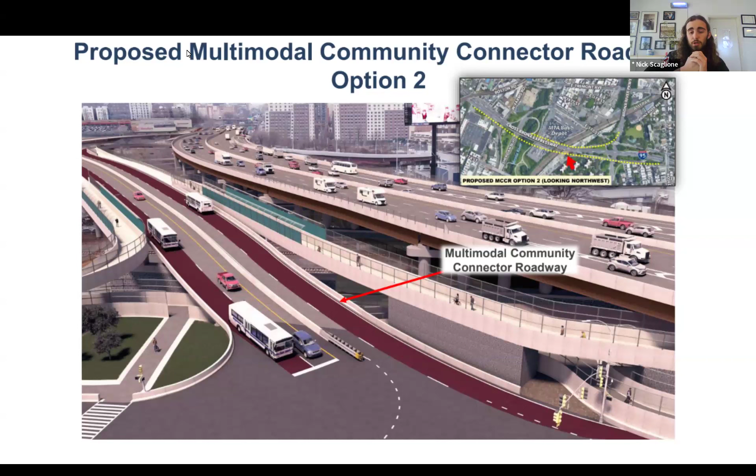You can also see it goes underneath the expressway as well, while linking on to... I think this is Boston Road. No, it's not, because Boston's up there. I'm not sure which specific road. It's Bronx River Avenue, thank you Danny. So yeah, this is where it connects onto Bronx River Avenue, which is an interesting existing crosswalk as is. There's a bunch of looping you can't see off on the sides here as well. That is going to be to make these roadways ADA compliant.

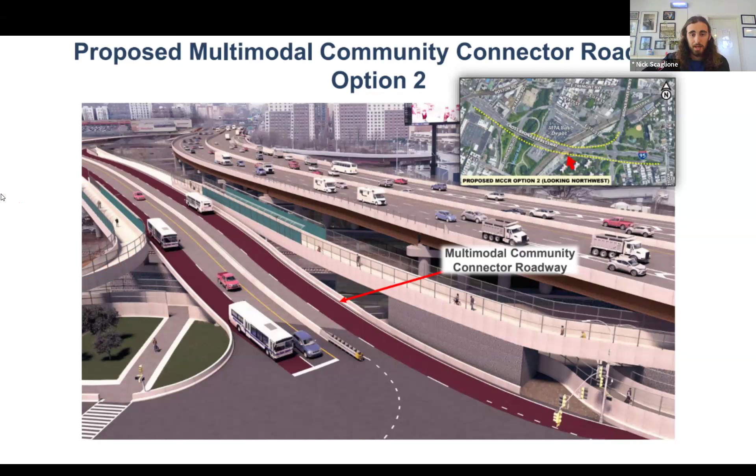And if we want to go to the next slide, we can get an idea of what this is going to look like from on the ground. You can see where this connector roadway comes up from underneath the expressway and spirals out around to then continue on. Yes, thank you Victoria, those are the two proposed landing points for the roadway. They are also planning on adding a loop on the other side.

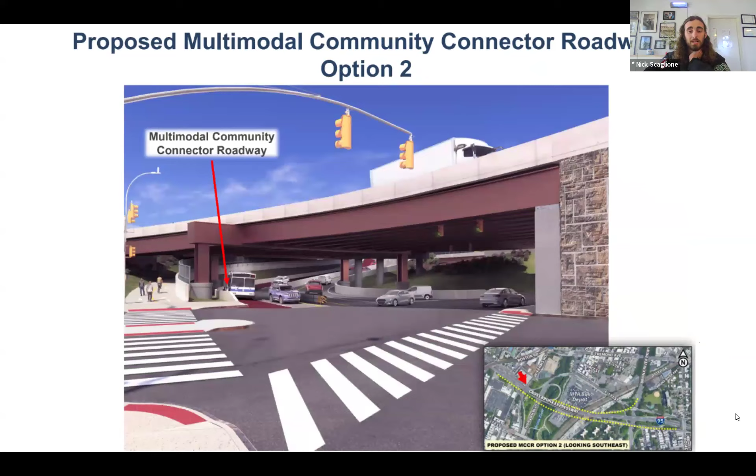There is no existing plan to connect any part of this multimodal connector roadway onto the parks, at least as was last shown to us during the meetings. A thing to note is that some of these renderings and descriptions have changed as meetings have gone on and as we've seen new designs, since this is still currently being worked on. Here you can see the proposal for the connector roadway with a path on either side. Again, there's very little difference here, and this is just providing caged walkways on the edges as opposed to anything substantial or protected for pedestrians, or any kind of green space within.

Next, I think that's probably all of them. Yeah. All right, I can take over from here, unless you want to keep going. Is there more information you want to share, Nick? No, unless people have any really brief questions, but I haven't seen any jotted in chat. We can get more into the weeds of things later, there's a bunch of technicals we can get into.

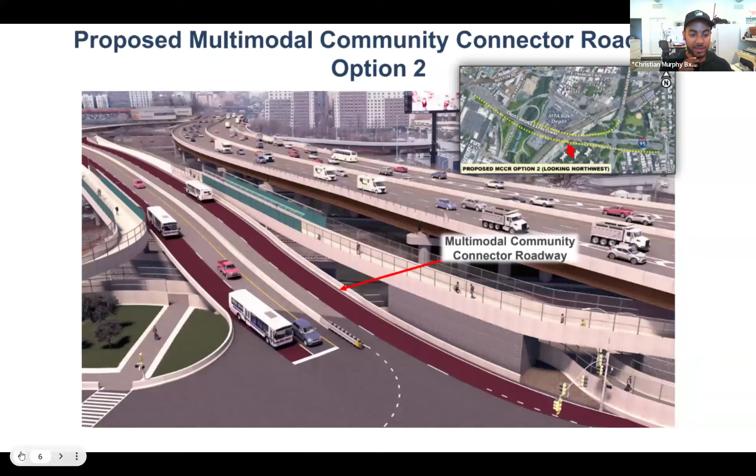Yeah, so we're going to be breaking up into breakout groups in just a bit. We'll have a chance to sit down and discuss these things in more detail. If possible, we might use the Bronx River Alliance team, so the Greenway team, Foodway team, the Ecology team, to extend these conversations if there's more good recommendations that can be made. We'll be meeting with DOT at some point in the future to talk about what's been discussed with the community and make recommendations that we hope they will take into consideration and implement. We're going to use these spaces now to generate ideas that can help protect both the communities and the Bronx River.

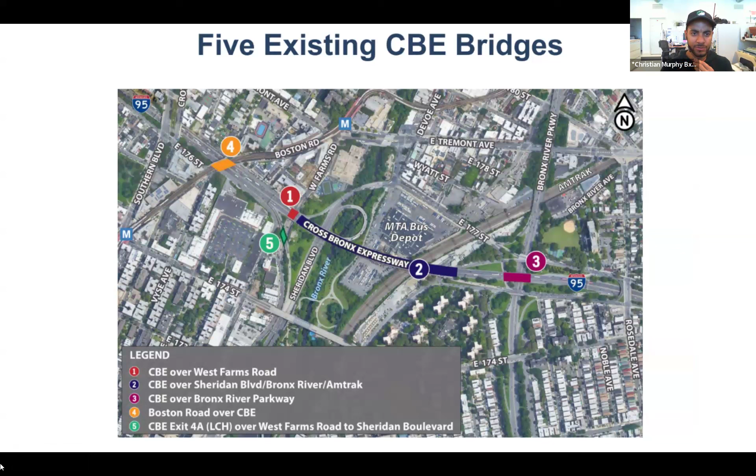Thanks, Christian. So in addition to the dumping in the river from the construction work that Christian mentioned, as well as potential increases in air, water, and noise pollution, something else we experienced last time with this ramp that Christian brought up was park closures. The northern end of Starlight Park was closed several times and was impossible to access from West Farms, that neighborhood north of the park. For those who walk and bike around the neighborhood, that's really the safest way to get into the neighborhood, from the north.

And if you're going to be rerouted, you have to go down West Farms Road, up and over the 174th Street Bridge without a ramp, and get back down into Starlight Park.

I know people consider greenways and parks to be places of recreation, but they're also places of transportation. These are transportation corridors for people who walk and bike through the park to get where they need to go. When these parks are closed, and all indications are that part of Starlight Park will be closed during construction of these overpasses, community members will be completely sealed off from accessing different parts of these neighborhoods in Soundview, Crotona Park East, West Farms, etc.

Not to mention there are a handful of schools nearby this potential construction area as well—the Lorraine Hansberry School on West Farms Road, a daycare, as well as a community garden. Drew Gardens is right on the river, just north of the Cross Bronx Expressway and that new ramp that was built. We hope there are no impacts to this important community space as well.

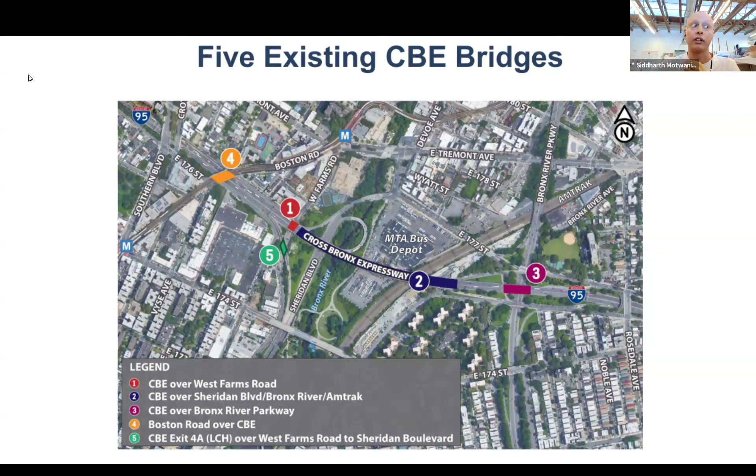Back in 2016, we kicked off a campaign called Cap the Cross Bronx, looking at these below-grade portions of the highway and seeking to cap them. It was really a 4-point plan to reduce air pollution, reduce noise pollution, reconnect neighborhoods, and create new open spaces.

In 2018, there was a case study by a group of doctors at Columbia University called The Cost Effectiveness of Capping the Cross Bronx for the Use of Parks. We were able to take this case study to our elected officials, and in 2021 they secured $2 million for a feasibility study. Currently that feasibility study is being conducted by New York State DOT, New York City DOT, the Department of Health, and New York City Department of Planning, and it's called Reimagine the Cross Bronx.

From their website, Reimagine the Cross Bronx is a collective effort with communities to re-envision the Cross Bronx from the Harlem River to the Hutchinson River Parkway, helping to reconnect the communities divided by it and lessen the negative impacts it's had on the surrounding neighborhoods.

So looking at these two projects: Reimagine the Cross Bronx is a feasibility study, while this current project going on is a fully funded project. The feasibility study comes up with ideas of what can happen, and funding would have to be secured for those things to happen. But for this particular project, the money has already been secured, and construction will start within a few years.

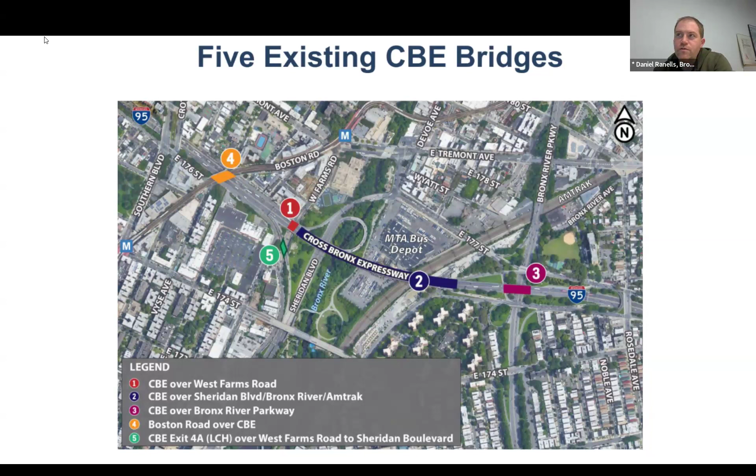Will there be community input sessions? They have met with some community boards, and we've heard there's supposed to be one public community input session. We do have some meetings to share with you all. On April 24th, New York State DOT will be presenting about this project around 5 o'clock, and then on April 18th at Community Board 6. These are also both in the chat with links for more information.

Elena, do you want to talk about our community discussion prompts here?

Sure, hi everybody, my name is Elena. I'm an advisor with the Bronx River Alliance. I just want to make sure the questions put in the chat first got addressed. I know we were talking about an unnamed design session State DOT says will take place - unclear the relationship of that to the actual timing of the design, or what range of design input they are looking for at this short date.

But it sounds like you did give the construction timeline, right? I'm just checking. I just want to make sure before we go into some other questions - it seems like there's some process questions coming up about sessions, about upcoming presentations.

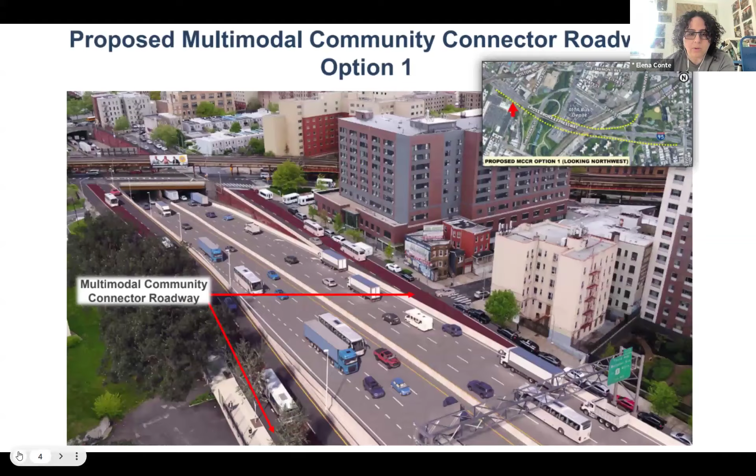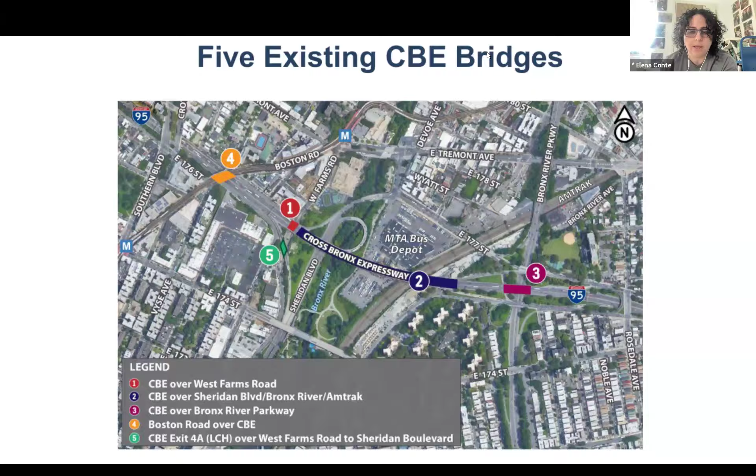I think we should - are you going to a particular slide, Danny, to show? Okay, you're showing me, am I not? I can also stop screen sharing if that's helpful. It might be for a little bit. I have a sense we might call it back up, but if you could close that, and invite everybody to be daring and bold and put on your camera if you dare, that would be most welcome so we could see each other as much as possible. So that invitation is there. Thank you. Feels warmer already in here.

Thanks, so I think what we wanted to do - we just dropped a lot of information, right? Some of which you may have heard before, some might be completely new. I think to invite the folks for whom this is pretty new, who just got the basic pieces of this, to share what is immediately coming up for you, almost a reaction moment to what we saw in the presentation. I don't know who those folks are for whom it's pretty new.

So yes, okay, look at that - there's folks raising their hands. So there's Mundo, there's Carolyn. I'm naming because we're gonna make a queue. Mundo, Carolyn, I thought I saw Kelly, did you raise your hand? No, I'm not trying to put you on the spot. Did you? Great. Victor, did you also have your hand up? Or am I - no? You did it. Okay, now Victor, he's in the know. Is there anybody else as we're making our reaction queue here? Oh, Ramona, Brian, great, okay, so we got some hands up.